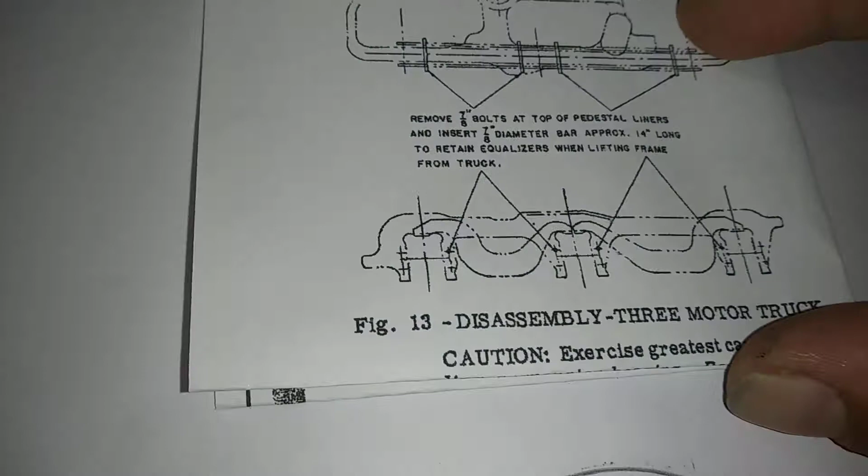So what we got here is a truck bolster. This would be a 3-motor truck. Notice wheel journal 1, wheel journal 2, wheel journal 3. Notice this side bolster is underneath. This one's on top. So what we're going to do is something they haven't done yet.

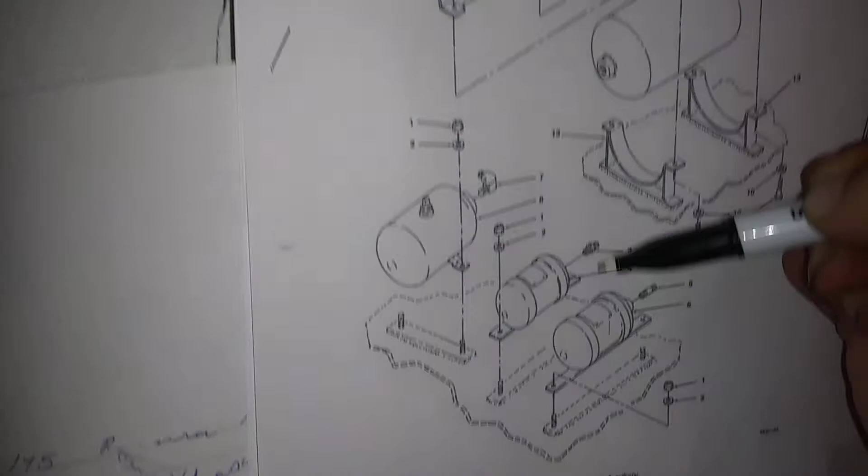We're going to add, this one says auxiliary, but we're just going to cross that out, put a reserve. And your center bolster, which is the one that keeps it fastened to the locomotive. And then that reservoir is going to go right in the middle.

We're going to take apart this bad boy, but let's peek at the brakes first. What you got is you got one brake here, all right? You got one brake there, one brake there. You kind of grab the wheels the same way, all right? There's one on the bottom, there's one on the bottom.

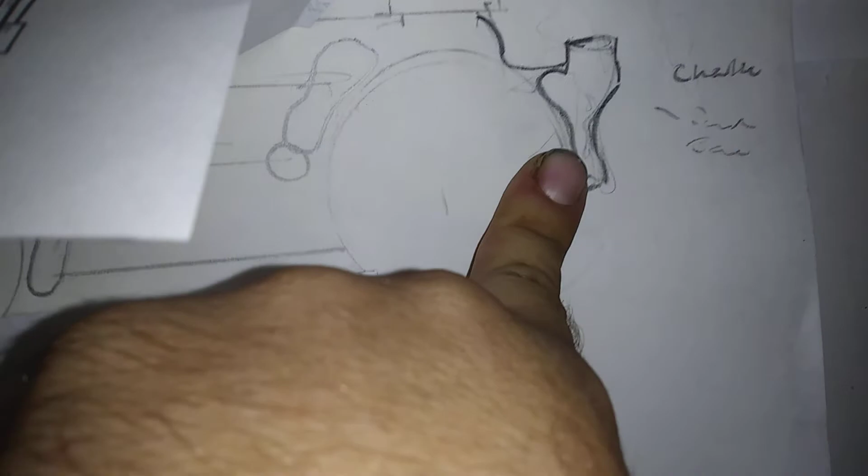Then here would be a chute. Whether it be one of those chalk chutes that you see at the end of an electrician's trailer, but this one's going to be sand. And there'll be one over here too. And this is the story behind it. And then you see these brakes down here. Well, this comes from a rail car. This is your brake cylinder, brake fulcrum, and then this.

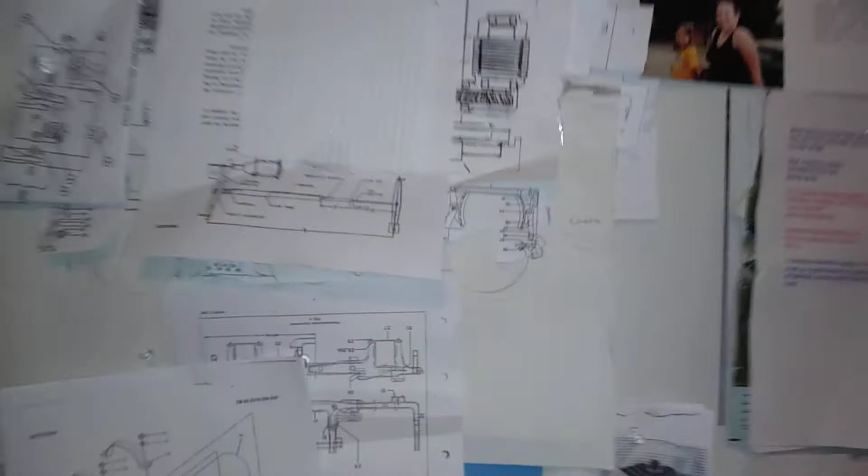So just imagine that going over to the brake cylinder, the brake shoes, the brake levers, and then over here, we'll just consider these three. We'll say this is the end of the truck, but it really goes this way when I unfold it. You'd have, not auxiliary, but main and your 3 cutoff valves. I don't know how to put cutoff lever in there yet. We did the anti-creep video.

So what I got is one pad with two wheel trucks. I'm going to go through all these old school steam engines, right? And we're going to rewrite the side bolsters and the brakes for as many as we can.

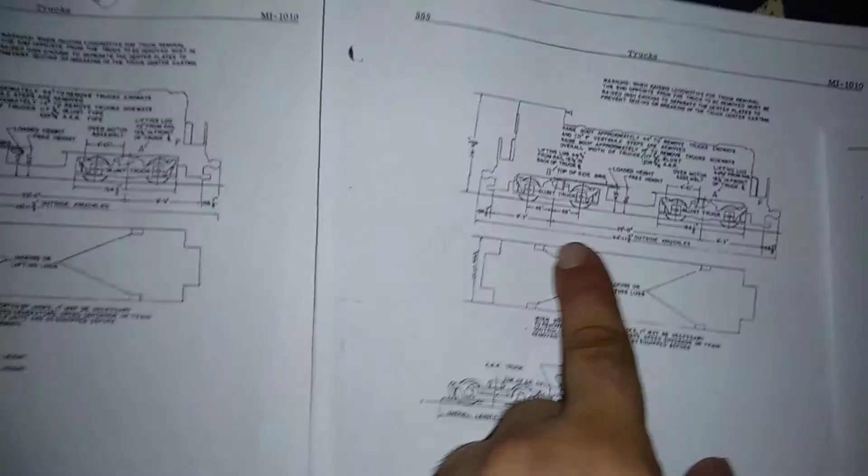Here would be a 044 model. Notice this truck's just a little different. Yeah, it gives you some good markings. Like they'd be about 46 off from the center truck, so about 8 feet on that small 044 model. This is once again our baby. Then for our side profile, we'll go over this.

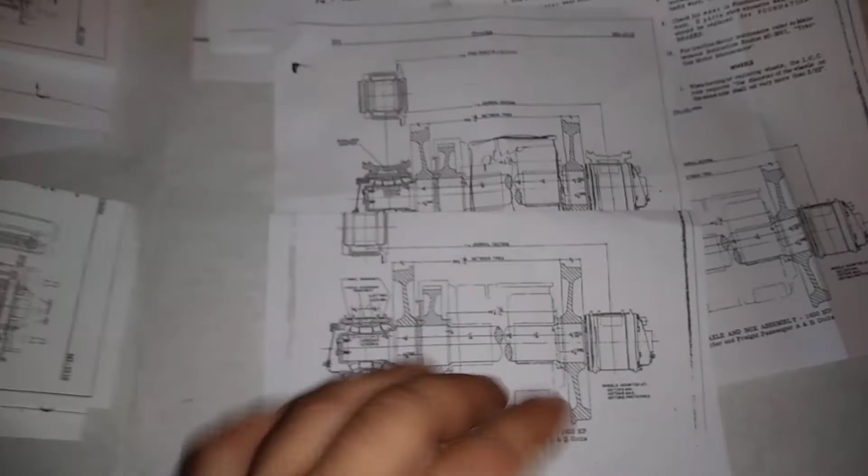In tape number 2, I've mirrored the braking just to make another version of this, but we're going to unfold that, and I'm going to do a little paperwork here, see what I can come up with, and we'll come back to you with tape number 2 explaining the axle journals and the traction motors and our little secret weapon, the center bolster air cylinder with our expert braking. So we're kind of rewriting Westinghouse with our trucks for our baby locomotive.

You know, a lot of scanning and folding. You might want to scan on like a dimension line like this, folding on dimension lines and centers and halves, and then we apply pictures to the drawing, use old pictures as much as we can to save artwork. Yeah, that's all I can say.